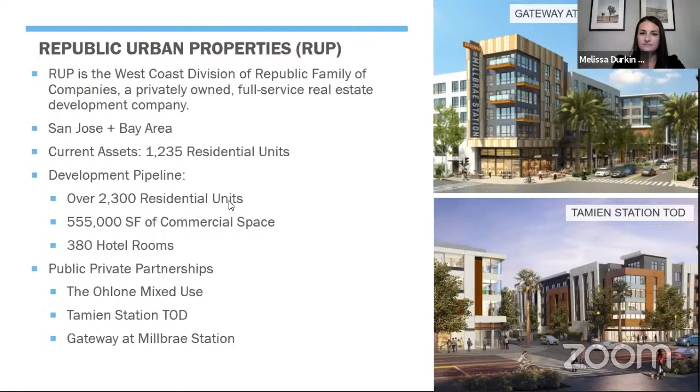Hi, Scott Johnson, EAH. Some 50 years ago, communities across the nation mobilized to demand fair housing, social justice, and economic equality. EAH's origins grow out of that activism, and here we are, 50 years later, mobilizing and activating around the same underlying issues. EAH is a full-service nonprofit housing company, and we synchronize our community building work around 4 functional areas: development, property management, services, and advocacy.

Throughout those 50 years of our work, EAH has been invited to partner with diverse communities throughout California and Hawaii to deliver healthy, sustainable, affordable housing responsive to local need. EAH has developed over 100 properties, ranging from rural, lower density villages to high-rise urban towers, providing inclusive, affordable housing for large and small families, seniors, students, vets, the essential workforce, persons with disabilities, and other special needs. We have a strong presence in Santa Clara County, where we've developed and owned 15 permanently affordable rental communities, and where we provide property management services to a total of 26 residential and mixed-use properties.

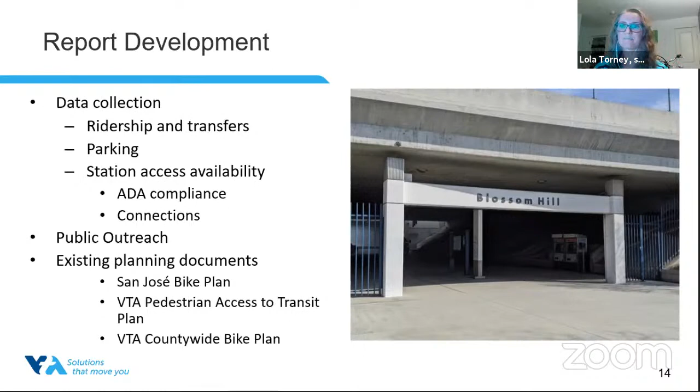For public outreach on the station access study, we held a community meeting back in May of last year, and did an online survey in spring of this year. We aimed to have additional outreach, such as pop-ups at the station site and additional community meetings in March to complement the online survey, but with COVID that was deemed unsafe, so the public survey was the only method utilized.

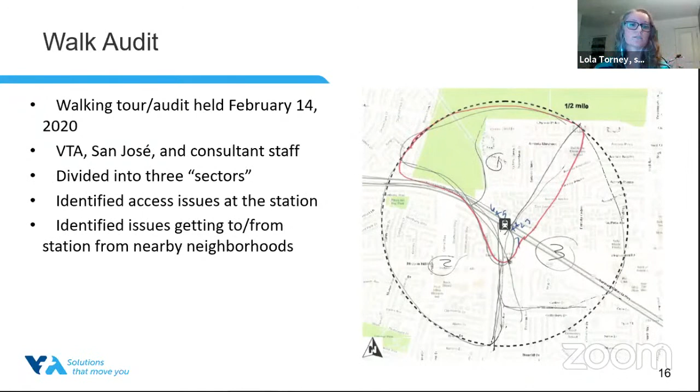Some of the not so positive things we saw in our audit: curb ramps not aligning with crosswalks, intersections with no curb ramps at all, or old and faded wayfinding signage.

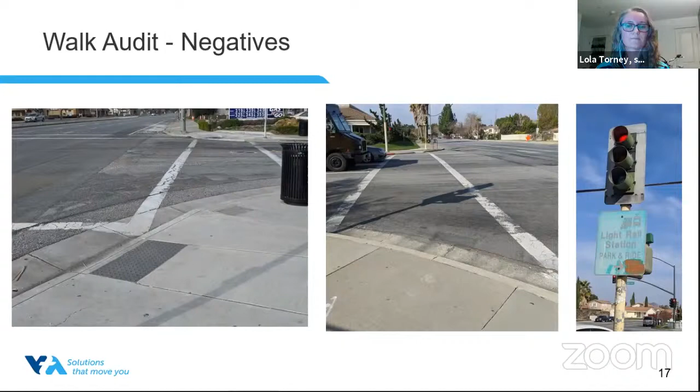But luckily, we also saw some good things on our tour: great access to commercial areas, and several locations with some very wide sidewalks, which is nice.

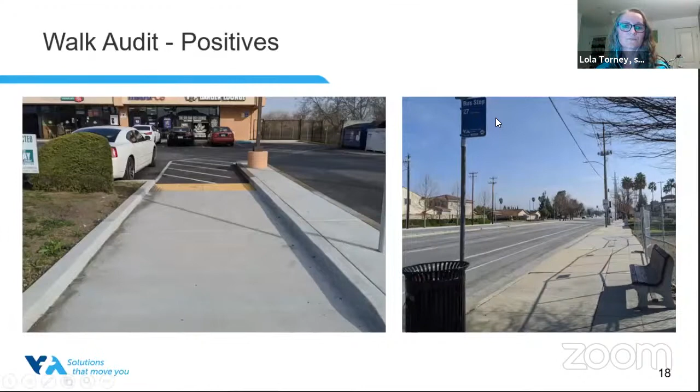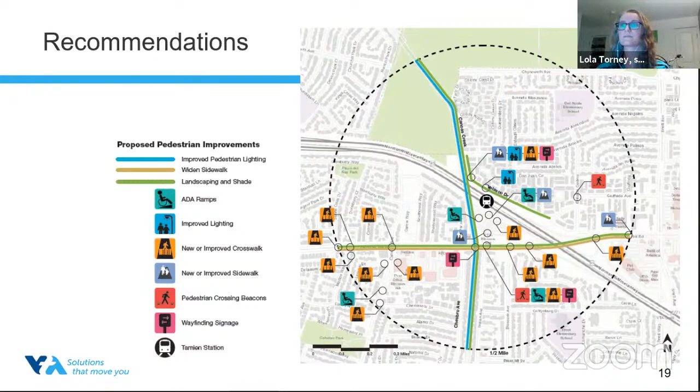For recommended bikeway improvements: bike boxes, bike parking, a bike share station at the site, through bike lanes or cross bike striping at intersections, separated bike lanes along Blossom Hill Road, Blossom Avenue, Cahalan Avenue south of Blossom Hill Road, and Chenoweth Avenue, as well as bicycle boulevard treatments along Cahalan Avenue north of Blossom Hill Road. All of those were identified in the city's Better Bike Plan, set to be adopted sometime this month. And then the big recommendation is a new trail between Blossom Hill Road and Martial Cottle Park.

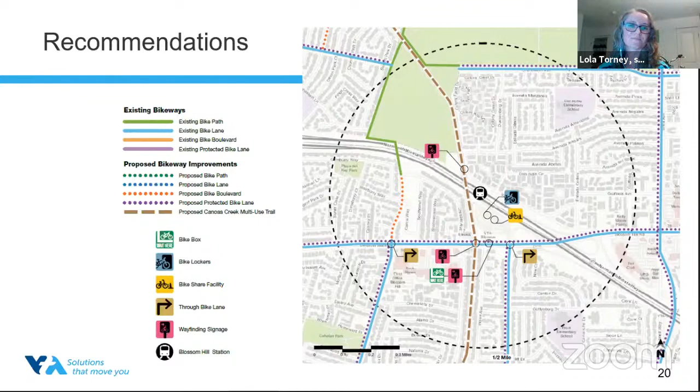All the recommendations have been shared with project developers and San Jose. You can go to the Blossom Hill Station website to view the final access study on your own time and dig into the reports and view the maps. We see this report helping with implementation in four ways: supporting grant applications, informing negotiations with our developer partners here tonight, informing other planning efforts such as bike-ped circulation or transit service scheduling, and identifying other implementation opportunities through agency coordination. And with that, I will pass it on to Melissa Durkin with our development team. Thank you.

Hi everyone, my name is Melissa Durkin, and I am the Development Director and in-house counsel for Republic Urban. I'm happy to talk about the development application, about what we're actually building on site. Next slide.

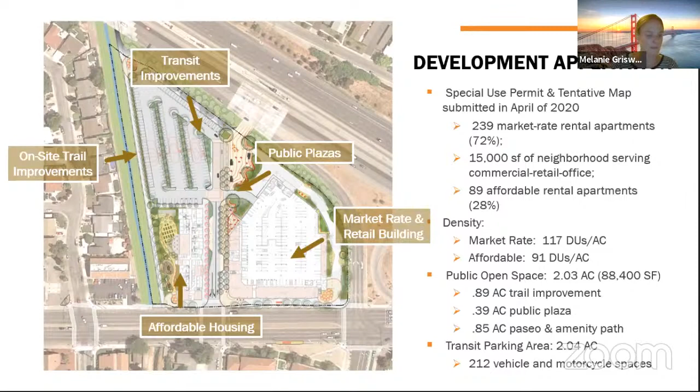One of the major goals for the site was thinking about how we can limit the amount of parking and reduce the surface parking lot, while maximizing shared opportunities for parking, making the best use of the space instead of just having a surface parking lot that doesn't really benefit much other than cars. So what we have now is roughly the same amount of parking spots as before, but divided differently.

We've divided the parking into the transit area, which has 212 parking spots, based on what VTA assessed as their needs for Blossom Hill light rail users. In the market rate building, we've put the majority of the parking for the project, with a total of 323 parking spaces.

Those spaces will be shared between the affordable residents, the market rate residents, and the commercial uses. By putting them all in the same area, we maximize the opportunity for overlapping uses, with residents using more of the parking in the evening, and commercial tenants and visitors using them during the day. Rather than doubling up and wasting that space, we've put them in the market rate building, hoping that will make the site more efficient.

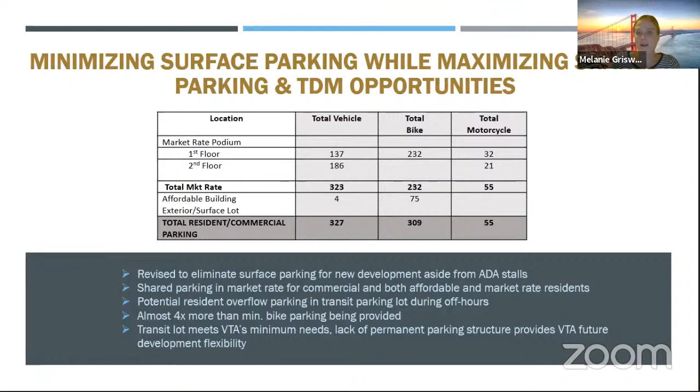One of the things we're really proud of in this development is the number of bike parking spots. We have a total of 309 permanent bike parking spots available for commercial and residential users, plus additional bike parking available in the VTA lot for neighborhood residents using the VTA station. That's an approximate ratio of 1 bike per dwelling unit, about 4 times more than the city's minimum requirement. Next slide.

So the market rate building. The architecture that you see here is going to be consistent both on the affordable and the market rate building. We're going with a Spanish style architecture, more of a Mediterranean theme. We're incorporating limestone facades, some stone to really give it a rich texture, a rich feeling to the signature project.

As I discussed, we have the parking located within the market rate building. So the first 2 levels of the project are parking essentially, with the retail uses and the residential lobby and some of the neighborhood rooms being wrapped on the outside. So that parking is going to be largely hidden from view, giving a really beautiful exterior, something that's welcoming. You're not looking at the surface parking lots that we see so much of in San Jose.

The second floor of the market rate building, that's sort of that cutout, is where we will have amenities for the residents. We have a pool, barbecue area, and other things for residents to go to. And that will also be offered to the affordable residents as well.

We're currently exploring different opportunities for some mural art and signage. We've got some really great visibility from Highway 85 as we're coming along that road. And so what we want to do is have something really interesting, distinctive, something that signifies San Jose on the building, so that you've got something nice to look at as you're coming down the highway as well.

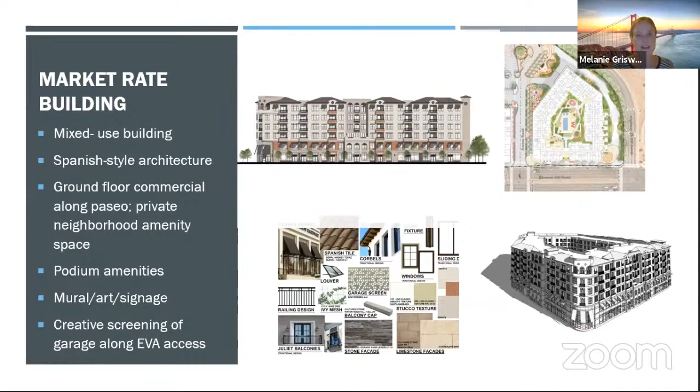I'm going to turn it over to Scott Johnson, our affordable partner, to talk more about the affordable building.

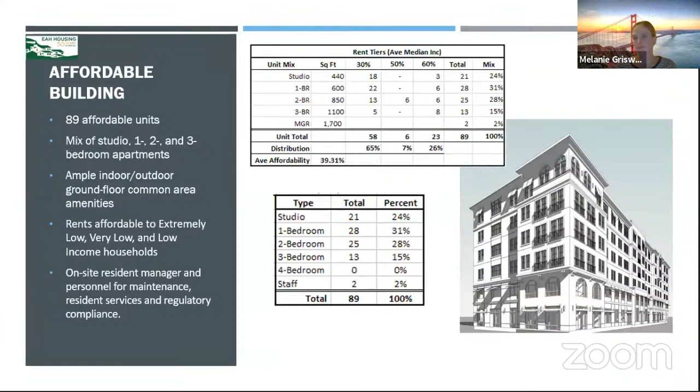Thank you. Integrated within the Blossom Hill Master Plan is an elegant 5-story affordable building that contains 89 residential units ranging from studios to 3-bedroom apartments, and which will offer significant indoor and outdoor amenities, including a large multi-use room, a learning center, a fitness room, computer lab, laundry room, bicycle hub, community garden space, and other outdoor open space amenities. The building is designed and programmed to provide affordable rental housing over the term of the VTA's long-term ground lease.

Affordable housing, deed restricted over the term of VTA's ground lease. At lease up, rents will be affordable to households earning extremely low, very low, and low incomes. When completed, the community will be leased up and will be professionally managed by EAH's Property Management Division, and our programming will offer a range of tenant services designed to support the health and wellness of those future tenants.

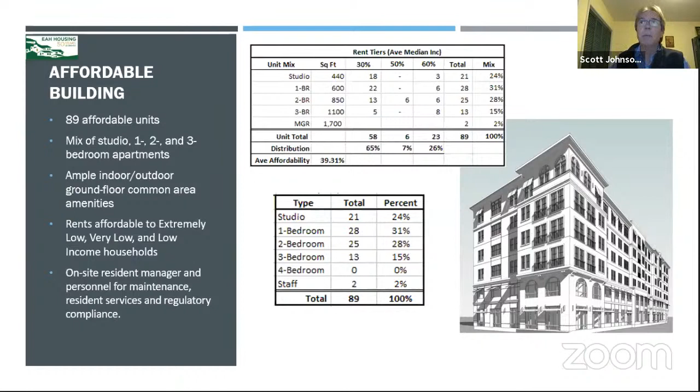And I'll now turn it back to Melanie of Republic Urban. Thanks, I'm back again. So next slide. Actually, we're on the slide I need.

So I'm going to talk to you a little bit more about the trail, the Martial Cottle Trail. I understand that this was something that was really, really important to the community, as to how to connect Blossom Hill to Martial Cottle Park and how to also improve some of the safety around the station.

One of the big things about doing that was, how do we actually create a passageway to go from Blossom Hill to Martial Cottle Park? As you see from the pictures, and as I'm sure many of you know who are familiar with the neighborhood, there's no current access from one side to another other than going through the station. And you have a large wall dividing it. We have fencing on the northeast side of the site where you can't access Martial Cottle Trail. So basically it's not very accessible, not very user-friendly, and doesn't really feel that safe.

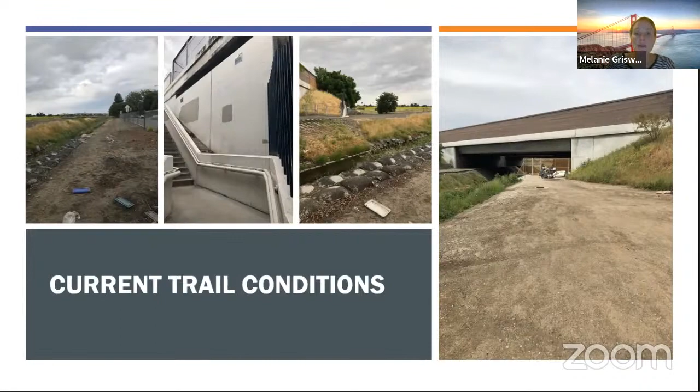So next slide, please. One of the things that we are going to be doing as part of this project is certainly doing the on-site improvements. That is the component of the Martial Cottle Trail that is located on the site, and that's at the bottom of that map that you see here.

We also have to work together with a number of different jurisdictions and landowners, because there's multiple people who have land that connects it to Martial Cottle Trail. So we have Caltrans, who owns the area underneath the freeway, Valley Water, who owns the portion of the site that is to the northwest, sort of what you see in the upper part of the map, and then we have the actual connection to county parks.

So we've been in sustained discussions with all of the different entities and have been gathering some really great support around how to actually make sure that this trail will get built and that we will be able to connect Blossom Hill to Martial Cottle Park.

Our goal is to have a Class A bike pedestrian trail and to incorporate sustainable landscape, benches, seating options, and enhanced wayfinding. We're working through that entitlement process right now as we speak, so hopefully we'll have some more to report.

We're going to have to seek permits from a bunch of different agencies, but there's a lot of support in the community, a lot of support among the agencies. So I think we're confident that we're going to find a path, literally, to being able to connect Blossom Hill to the parks.

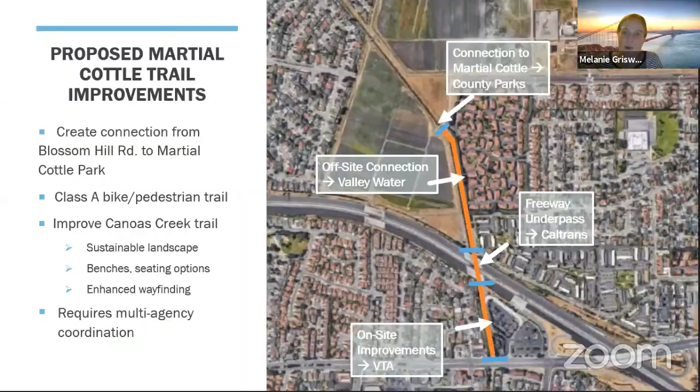And I'm going to turn it over at this point, I think, to Jim Stickley of WRT to talk more about the site plan and circulation and how we've been thinking about that.

Great, thanks, Melanie. Jim Stickley, principal with WRT. We are an urban planning and design firm, and our firm has been involved with helping communities improve their public space and transit-oriented areas for over 50 years. So this is a project very much in our sweet spot. We've been fortunate to collaborate with the team in developing the site plan. And then more on the landscape architecture side, we are in the process of designing these spaces and what the experience is that people are having as they move through these spaces.

So the next slide, my colleagues have talked a lot about some of the goals for the project. Kelly mentioned increasing ridership. Lola mentioned a lot of the access enhancements that are needed. And Melanie mentioned the Canoas Creek Trail and the importance that that will have in connecting this site and Blossom Hill Road all the way up to Martial Cottle Park. So I think our job has been to recognize all of those goals and in a sense build a framework for the plan that achieves those goals.

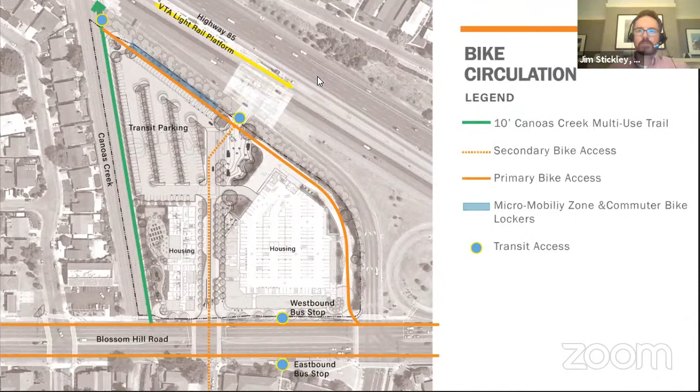So if that's our framework, then onto that framework we can start to develop spaces where different things happen. If we go to the next slide, we can see what those spaces are. So around back of the market rate is the amenity trail. Up through the center is the Paseo, where we've got lots of different activities that are activating that Paseo. At the end of that terminus is the Transit Plaza, and that's really the destination in terms of the public space, situated so that it really enhances and facilitates the use of the station itself. Trailheads where these circles are at each of the corners sort of announce and invite people to come in and use not only the amenity trail but also the creek trail.

So those are the major spaces, and one more, which is the streetscape along Blossom Hill itself. So some sort of an enhanced pedestrian environment, but also something that's pleasant for bus users to access that use the bus stops right here in the front edge of this site.

So I'm going to kind of walk through each of these spaces very briefly just to talk about how we're thinking about the character of those spaces. Next slide. So the Paseo, as I said, comes right up the center. This is a really broad, gracious double alley of trees.

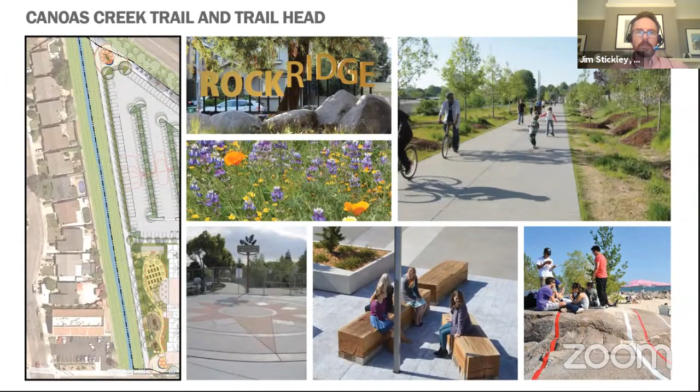And then the creek trail itself, as Melanie described, this is planned to be very much enhanced from its current condition in terms of not only a multi-purpose path, but different rustic elements and furnishings as you go along the trail, and a planting scheme that can start to enhance the ecological function along the creek and use native species so that we can really start to take advantage of this as a part of the overall regional ecological network. And next slide.

And then the amenity trail that slips around behind the market rate building. This is really interesting space in which we envision lots of different activities happening. We're looking at having exercise stations for residents, but also for members of the public that just want to use this as an alternative trail to the station, or create a loop or connect to Martial Cottle Trail, a place to walk your dog, a place just to sit and reflect. So lots of amenities all along the way, as well as a buffering between this space and the freeway off ramps.

And then as you come up the Paseo, there is a space that is a small plaza associated with the community room of the market rate building, but also meant to be shared for other community uses. Someone in the community that wants to have a certain type of event or meeting could reserve this space, both the indoor component and the outdoor component. It's designed to be very informal, sort of a beer garden character, perhaps with some play structures for kids, and then a robust complement of planting, separating this space from the market rate building, but also providing opportunities for stormwater management.

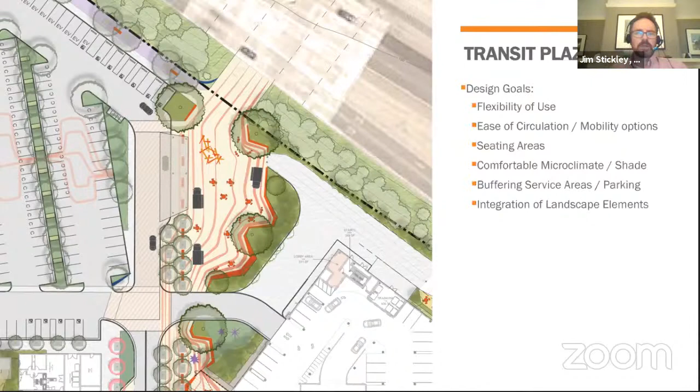Yeah, so here you can see some of the things we're thinking about. On the bottom, the little boy running on these very sculptural seating steps. There might be an art element just as you come out of the station, marking this as a distinctive place, so it really becomes known as the Blossom Hill identity. Paving that is organic in its forms and has a bit of interest even when it's not in use. And again, a really robust landscape surrounds this plaza, separating it from the market rate building and from the freeway, but providing an opportunity for stormwater management and native plantings. And I believe that's it.

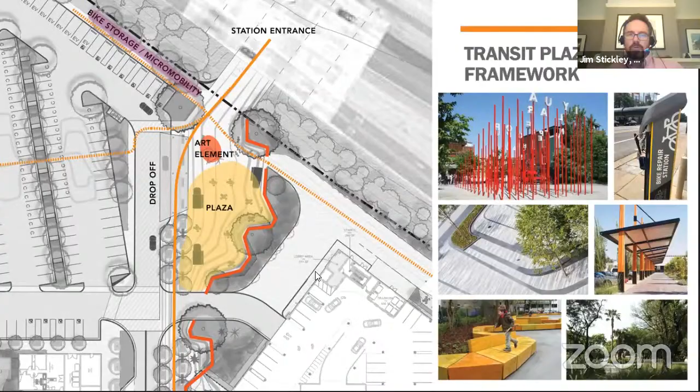And I'm turning it back over to Kelly. That's great. Thanks, Jim. You said you'd be brief, and I'm very impressed. I was like, wow, you did a lot with a lot of information.

Thank you. Just a couple of quick things to keep on the screen for now, and then I will get to your questions and try to put the best people in charge of answering them. And if we can't answer them tonight, we'll keep track of it.

If you go to vta.org/Blossom Hill Development, that's the VTA's project website. You can sign up to make sure you get email updates there. You can also go to the developer's own website, republic@blossomhill.com. They have a whole bunch of stuff there, including preliminary images, such as some of the ones you've seen tonight, and that also provides the link to the survey. So if you don't have time to do the survey tonight, or if you want to share it with other people in your neighborhood, you can get that through the developer's website as well.

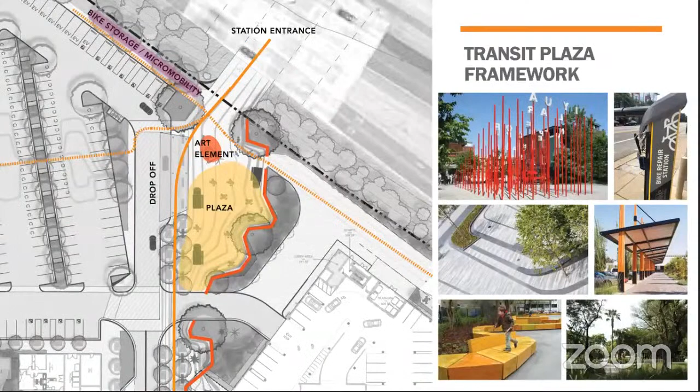I see another question there, Kathleen. You want me to go ahead? So there's a question from Rick: will VTA charge for parking, for daily use parking for the trolley commuters and the bus commuters?

Possibly. Right now, VTA does not charge for parking at any of their light rail park and ride lots. We do charge for parking at our BART stations—Milpitas and Berryessa—which have a daily parking charge, or you can buy a monthly pass. It's possible that in the future there will be a parking charge at other stations, depending on usage, but every time it has to be approved by the board—remember that opening slide with the board members' names listed. So there will be a public hearing with public comment anytime a station is proposed to transition to paid parking. It won't be a surprise, and there are currently no plans to charge for parking at the Blossom Hill station. In fact, the 210 parking spaces being kept for transit use are kept on purpose, because we know people use it to park for the day and take the light rail in.

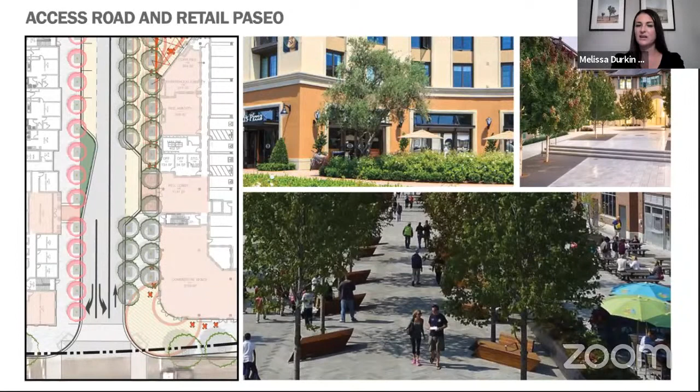So that pot of money, similar to an affordable housing impact fee, all goes to fund things that are important to the city. In this case, the VMT fee would be for projects that reduce congestion and reduce vehicle dependence. The city is really good at posting all of their environmental impact reports online, so as soon as a draft is available, it will be on the city's website.

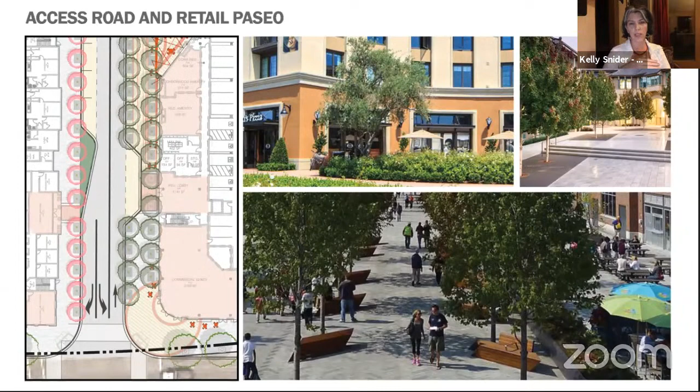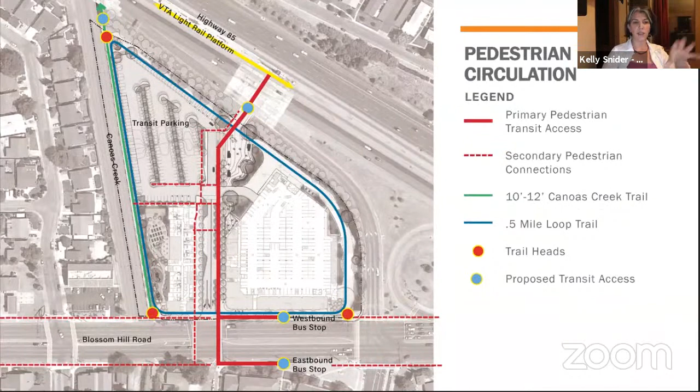I think it's worth pointing out a lot of the stuff that Jim showed. I don't know if we can get the whole site plan on the screen now too, that there will be 3 different ways to travel from the Blossom Hill station, the Blossom Hill bus stop, whether you're going eastbound or westbound, to the light rail station. You'll have the new trail on the far west side where the green line is, you'll have the sidewalks on both sides of the main entrance where the thick red line is, and then you'll have the active trail on the far right of the slide where the blue line is. So if you get dropped off by a friend, what we call kiss and ride, or even an Uber or another car, you could get dropped anywhere along there and access the station through any one of those 3 ways as a pedestrian, on a scooter, or in a mobility device. And if you're taking a bus, then you will have to traverse through the project from Blossom Hill Road back to the light rail station.

But it will be accessible, all of those will be ADA accessible. And just to add to that, I think we did try to be very deliberate about making that connection as direct as possible. Currently, if you tried to take this line shown in red on the diagram, that's the direct spine, you'd be going through the parking lot, or to avoid that, it's a more circuitous route. So having this central spine taking the most direct route from Blossom Hill to the station speaks to this point of accessibility. Sometimes, whether you're disabled or not, you're going to have a tight connection, so we want that connection to be as efficient as possible.

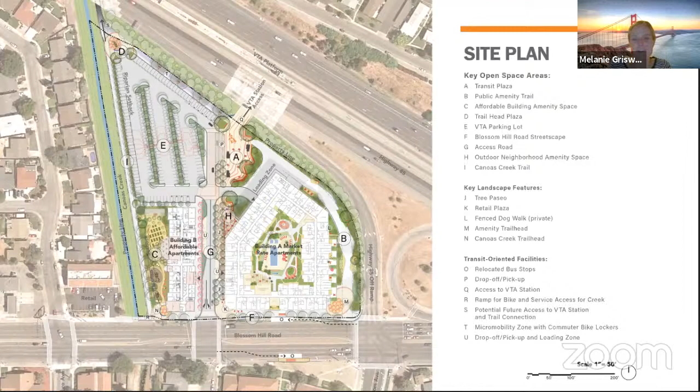I am excited to start looking at some more of the details of the trailheads that we're proposing, some of the cool amenities that we're able to program there, and also looking at some of the finishing details of maybe some art components, whether it's sculptures in the plaza areas or along the Paseo, and some murals on the sides of the buildings as well.

I'll go next. My favorite is what's shown in A, the transit plaza. I think utilizing the space in front of the transit plaza for things like food trucks, outdoor seating where people just want to hang out and wait for their friends to catch the light rail north to downtown, and just feel safe and comfortable out there, sounds amazing.

It's hard for me to pick because... Oh, sorry, go ahead Jesse. Go ahead, Jim. I'll go next.

Thanks. It's hard for me to pick because I think we're really excited about a lot of these different spaces. Definitely, I'm excited about the public space network as a whole and how it's working. But I gotta say that the Paseo really rises above for me. I think it could be a real destination for the neighborhood. If we get the right mix of ground floor uses, it could be really a place where people come and stroll and see and be seen and sit at little cafe tables and in the beer garden. I think it could be a really great place for the neighborhood.

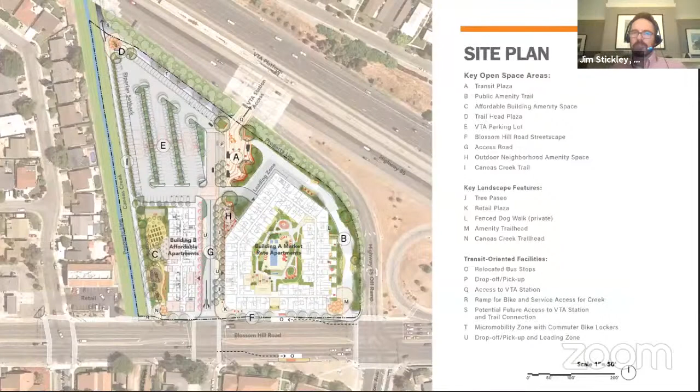This is Jesse. I think my favorite part about the project—I'm going to list a few—but my favorite part is increased ridership. When you build new transit-oriented development at station areas, we increase ridership for our system. One of the things many people complain about in VTA's transit system is our lack of ridership, and it is specifically development like this and land use like this that promotes ridership of our system. So I really appreciate the private investment going on between Republic Urban and EAH to make this happen.

Secondly, we have aging infrastructure sitting out there today, and this really enlivens and activates an asset, making it a community asset and a new neighborhood. So I'm really excited about that. And then last, the trail connection and the work that the developer has done to work with three, four, five agencies on making that trail connection happen at the request of our community—I just think is such a great benefit. So I'm super...